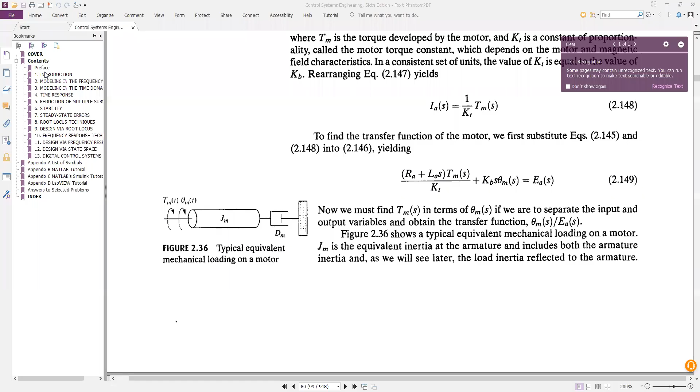Okay, let me share the screen. So from the first chapter, what you'll read? You see, that is your first chapter - Introduction to the control system.

In this chapter, you have to read the definition of control system. I have given you the sheet already, the slide is given to you. So first of all, you need to learn the definition of control system. Then see, control system - they define it.

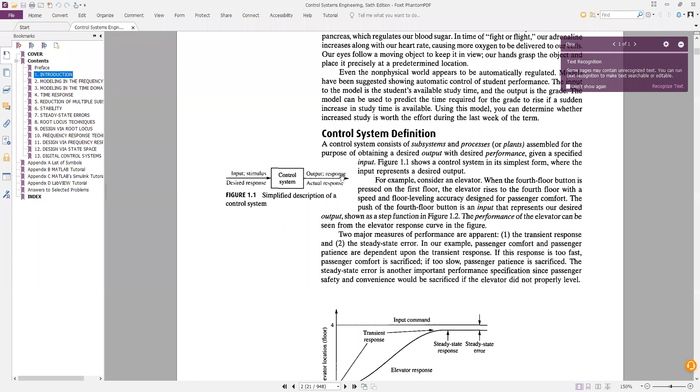And you need to know the block diagram of control system - what is the block diagram, and how does it represent? Okay, that is the thing. And see, some examples are there. These are the advantages of control system.

See why they use a control system - 4 primary reasons are there, like power amplification, remote control, convenience of input form, compensation for disturbances. These are the advantages of control system.

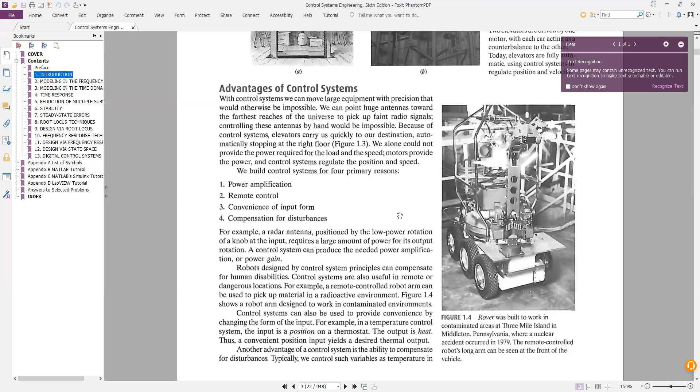And remote control, that means you can control any system remotely. The example is like a rocket or the satellite - NASA is controlling those things from the earth. And convenience of input form - you can change the input form, and compensation for disturbances. So these are the reasons why we use the control system.

Some histories are there. We do not need the history. If you want, you can check and see.

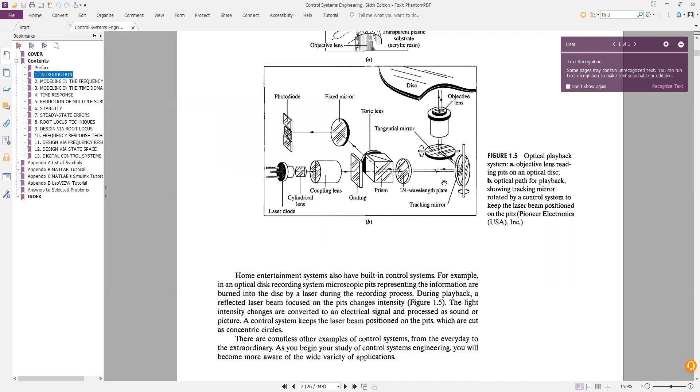It is an example - optical playback system I've given to you - and some types of control system like open loop and closed loop control system. This is the open loop - open loop has no feedback. On the other hand, closed loop has some feedback. So that is the main difference between open loop and closed loop control system.

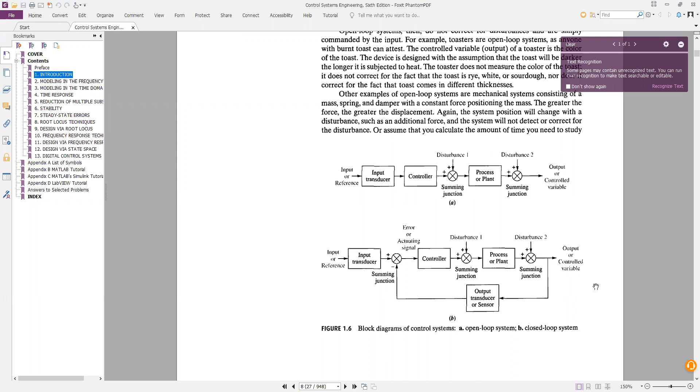And some other differences are also there, so if you check, then you can find it out - open loop and closed loop control system. See, that is another one - the hard disk. Hard disk is another example of control system.

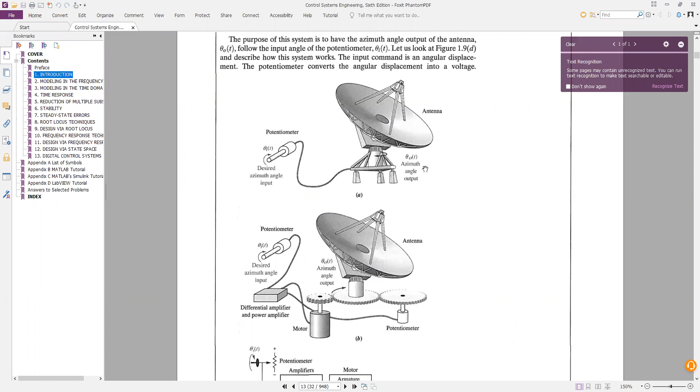It is an example of azimuthal control system - see, radar system. Here you are putting the desired angle, and according to your input, the antenna will rotate. That is another type.

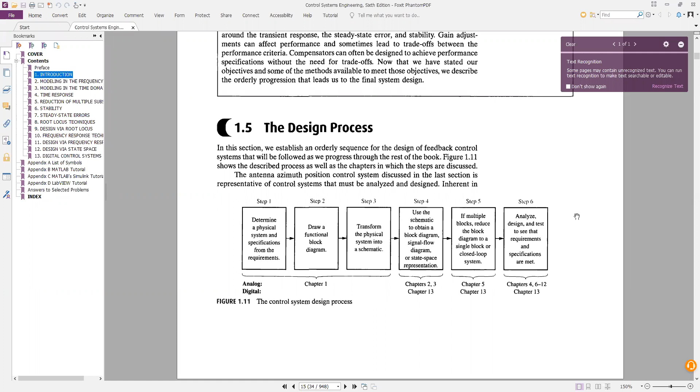And that is the design process actually - the steps are given here. These first three steps have been discussed in chapter 1, and 2, 3, and 13. Chapter 2, 3, and 13 contains step 4, and step 5 is discussed in chapter 5 and 13, and the final step, step 6, which is discussed in chapter 4, 6 to 12, and chapter 13. Okay, that is the thing, design process.

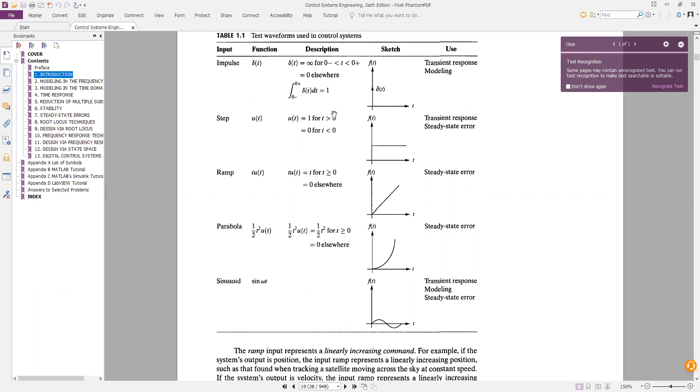So if you look at the first slide, then you can check this out and see these things are important. See, waveforms - I think I have discussed these things in the previous courses. See this, what are there? That is the impulse response, that is the step response, that is the ramp, that is the parabola, that is the sinusoid.

Remember this thing for your future studies. Delta T, impulse response delta T. I asked this question in the Viva in the last course, but unfortunately most of you have failed.

That is the problem, sir. Most of us, what do you say, sir? I have asked you about the impulse response. I just draw this one and asked you what type of signal this impulse is. But most of the students have failed to answer the correct one.

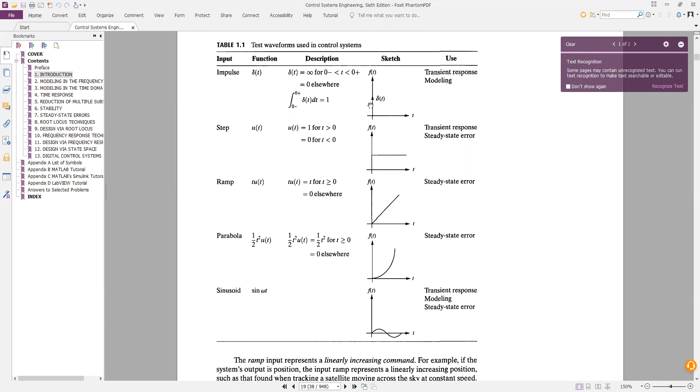Do you remember? Yes, sir. Some of you have failed to answer these questions. What is this? This is a step response. Let me zoom it. That is a step response.

Don't forget these kind of signals ever, because you are an engineer, an electrical engineer. You cannot forget this one, right? You have to remember all the time.

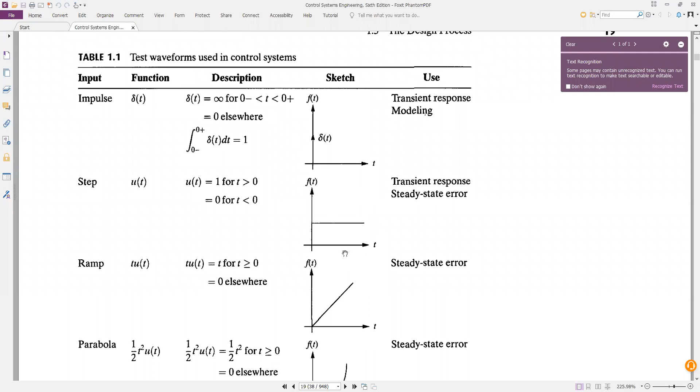So that is impulse response, that is step response. This is ramp, this is parabola, and this is sinusoid. Actually we do know the sinusoidal signal, but we forget about the others, which is very bad. We have to remember all: impulse, step, ramp, parabola, and sinusoid.

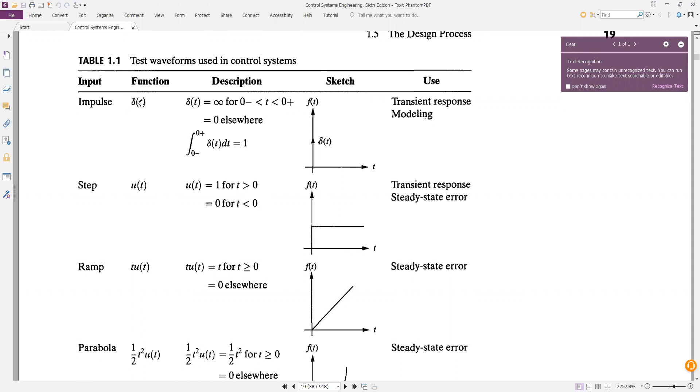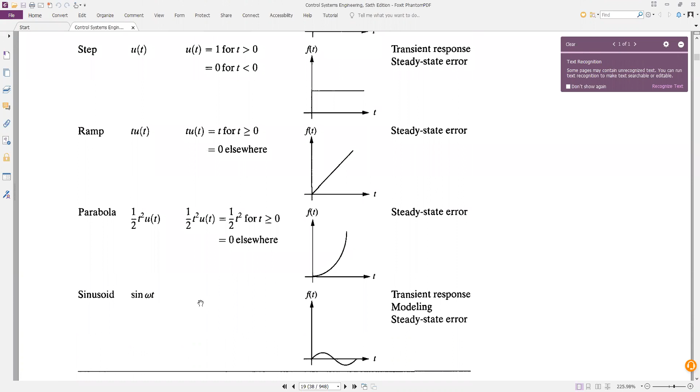And also remember the type of function. See, that is the delta function, delta t. That is ut, that is t ut, that is half t square ut, and this is sin omega t. These are the functions of this one.

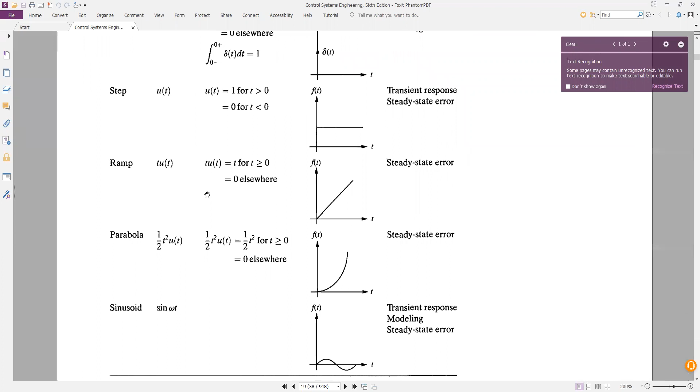Remember these things and it will be helpful for you in the future. So remember table 1.1. You can write it down on your notepad, on the paper, that it is table 1.1 from the book. You have to remember these things, because sometimes in the Viva I can ask you.

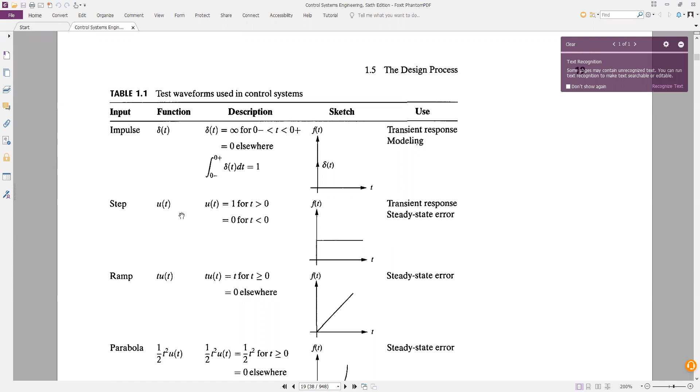At this level, do not forget this mistake. Do not mistake about this one. And that is from the first chapter.

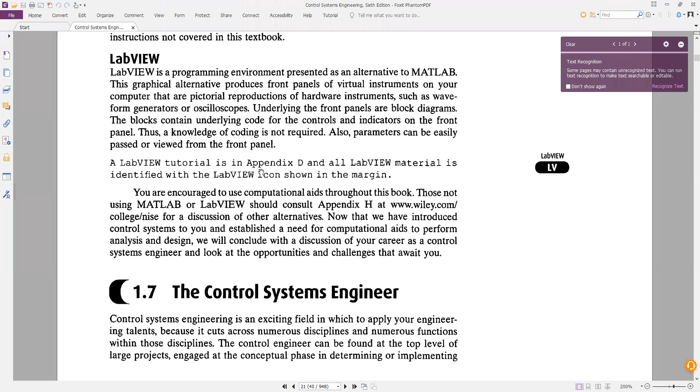So from the first chapter, what did you study? What is the control system, and what are the types of control systems, and what is the difference between the types, like open loop, closed loop? And what are the input waveform types, like impulse function, like a step, like ramp, like parabola, etc. So do not forget this one.

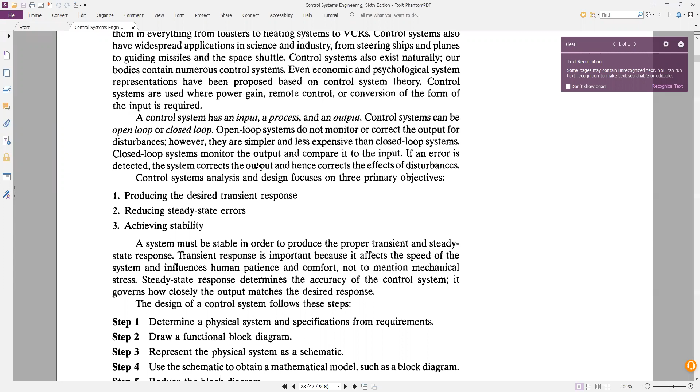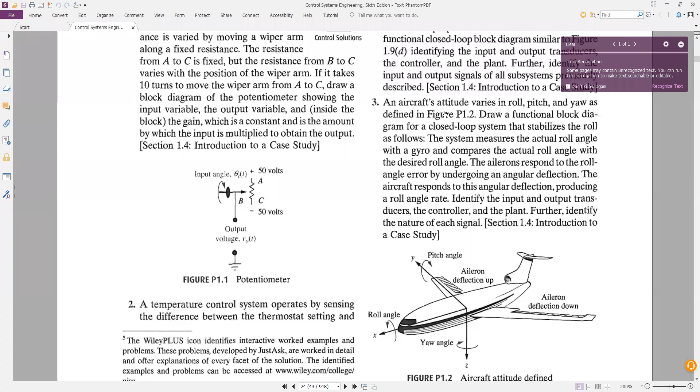Now, see, these are the actual problems. If I give you these things as an assignment, it would be very difficult for you. An aircraft's attitude varies in roll, pitch, and yaw, as defined in figure P1.2.

See this angle, that is the roll angle in the aircraft. This is the yaw angle. Yaw, see, Z. And that is the pitch angle. This is Y. X, Y, Z. That is the roll angle, that is the pitch angle, and that is the yaw angle.

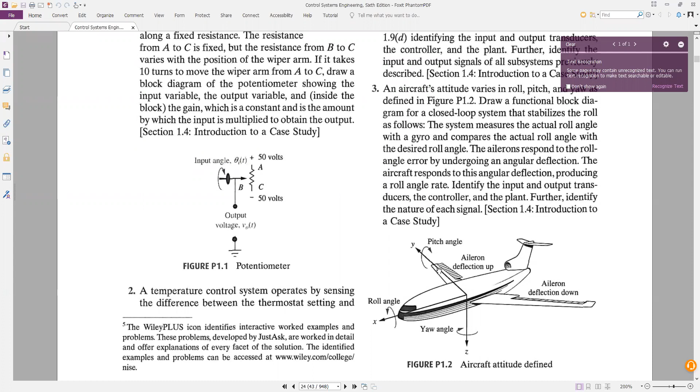See this part of the aircraft, it changes in the pitch angle, and the bottom part changes according to the yaw angle, right? And that is the roll angle.

An aircraft's attitude varies in roll, pitch, and yaw as defined in this figure. Draw a functional block diagram for a closed loop system that stabilizes the roll as follows. The system measures the actual roll angle with a gyro and compares the actual roll angle with the desired roll angle. The ailerons respond to the roll angle error by undergoing an angular deflection. The aircraft responds to this angular deflection, producing a roll angle rate. Identify the input and output transducers, the controller, and the plant. Further, identify the nature of the signal.

See, that is the problem you need to check. Okay, these things you can check.

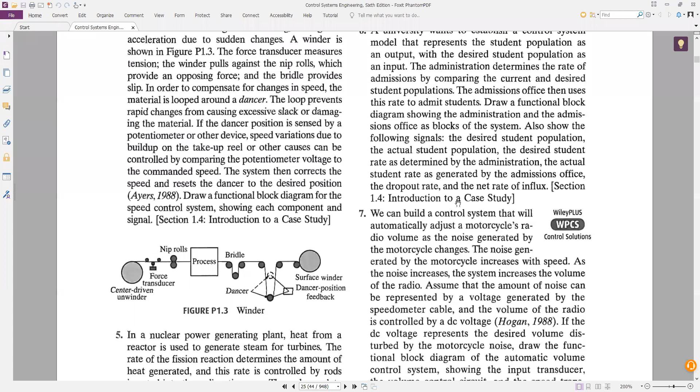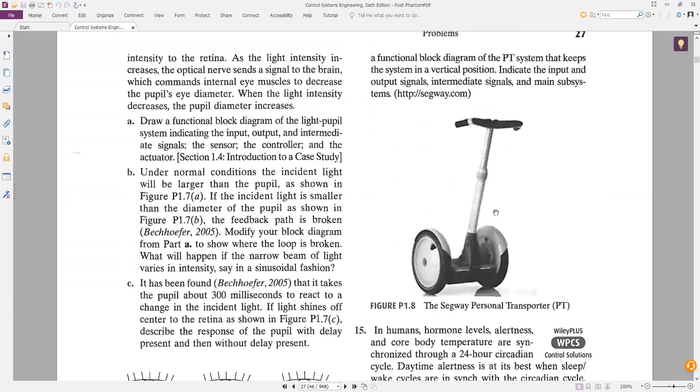Okay, so there are some other problems. See, pupil is shown black. Light beam is shown white. Light beam diameter is larger than pupil, light beam diameter is smaller than pupil, narrow light beam is illuminated at pupil's edge.

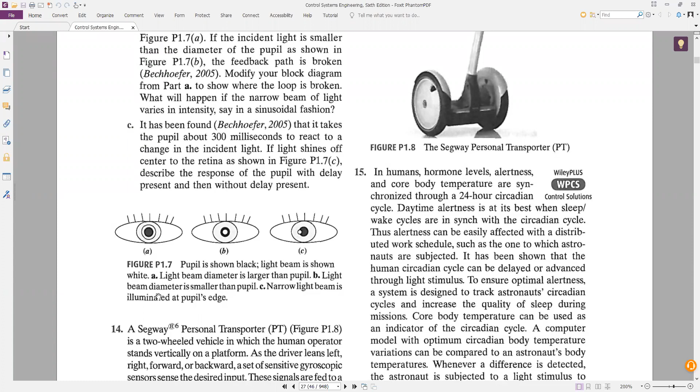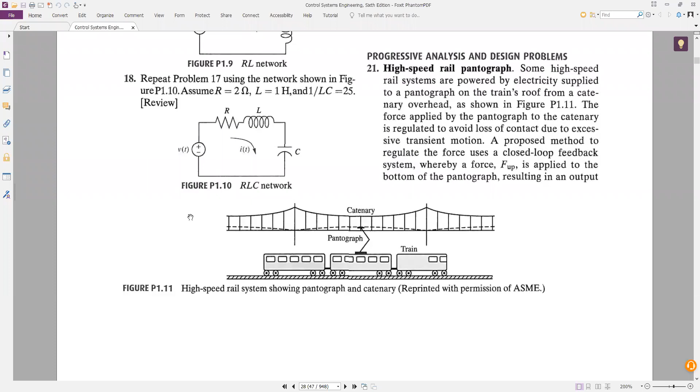These are actually the problems you have to check for your better understanding about the control system, but I am not giving you here. If you try to solve these at your home, I think you will have a better idea about the control system. But since we have limitation of time, we cannot do whatever we want.

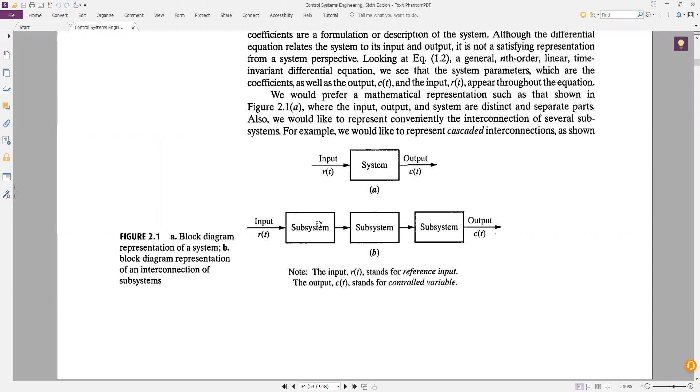Okay, now modeling in the frequency domain from chapter 2 - what you have to learn, what you have to check. You have to check a few things like...

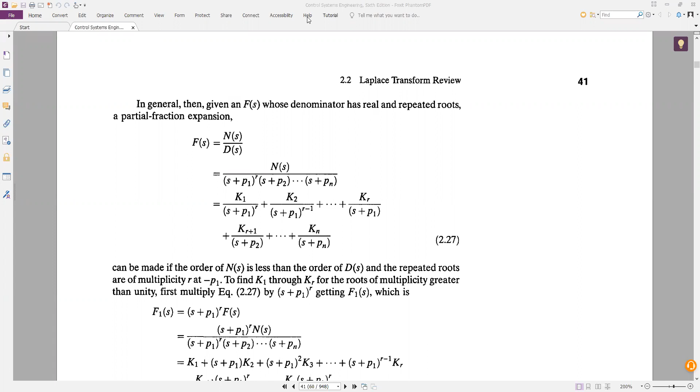Okay, so transfer function comes in chapter 2. So you have to check the definition of transfer function as well as some examples.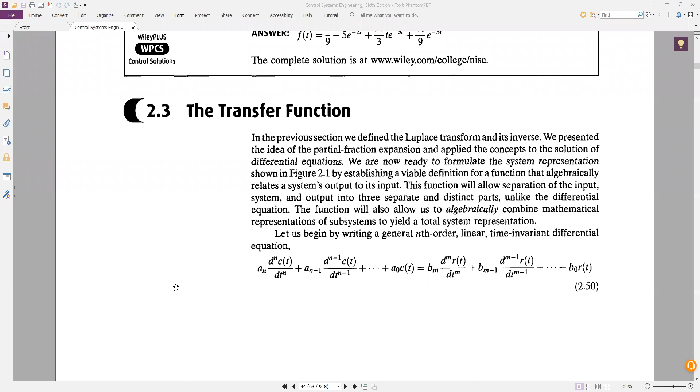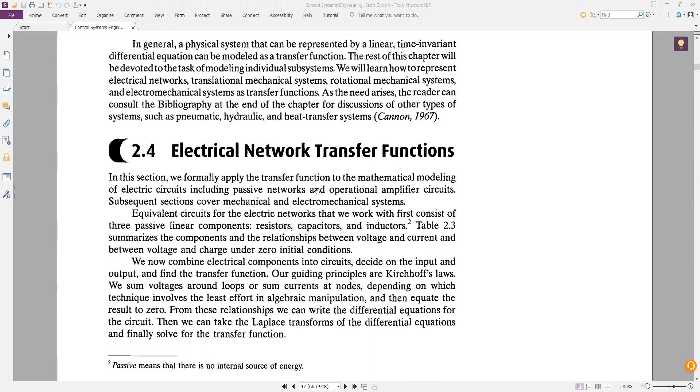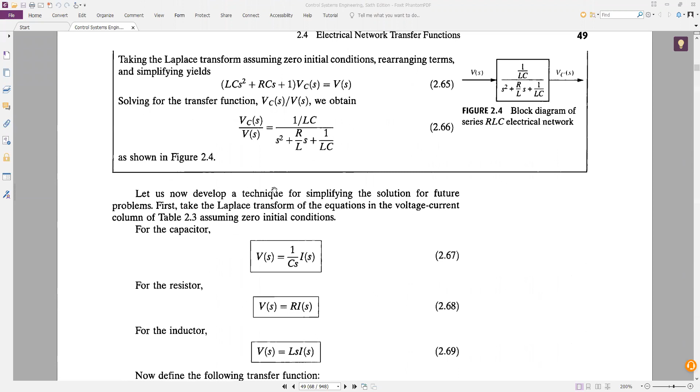So from the transfer function, you have to check some problems - some default problems, electrical network transfer functions. You need to remember the table so that you can solve given problems like 2.6, then mesh analysis problems are also given, as well as the op-amp problem.

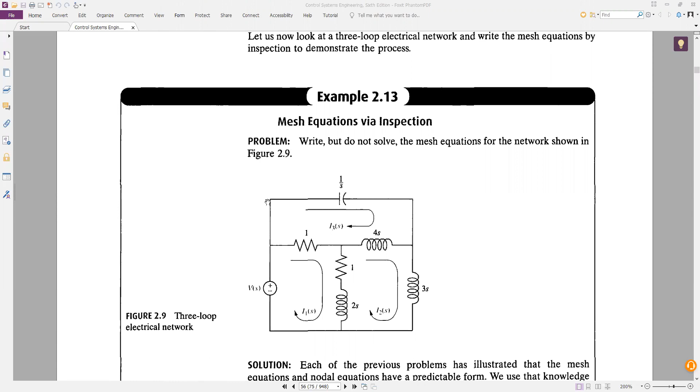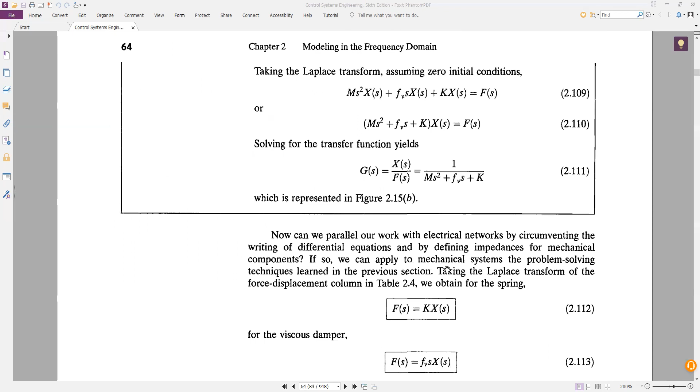After that, we have discussed the translational mechanical system transfer functions. From here, you have to check only two problems, 2.16 and 2.17. Only two problems you have to check, and 2.18 also.

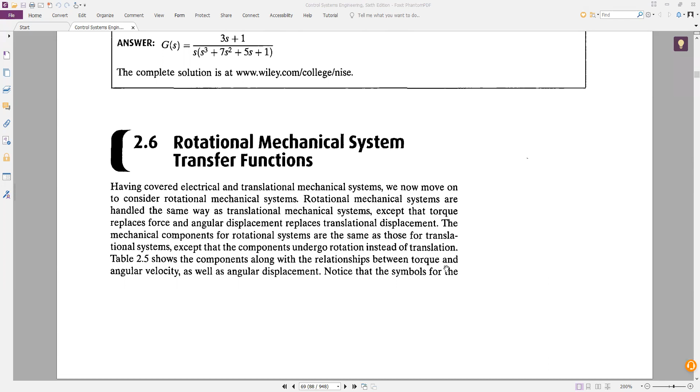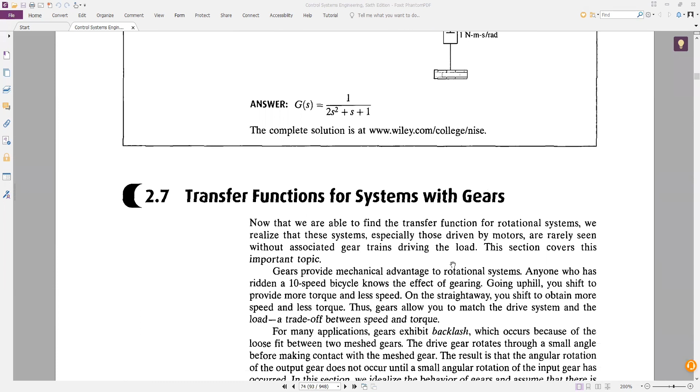And from the rotational mechanical system, this one, you have to check 2.19, 2.20, that's it. And with gears, transfer functions with gears, from here you have to check 2.21 and 2.22.

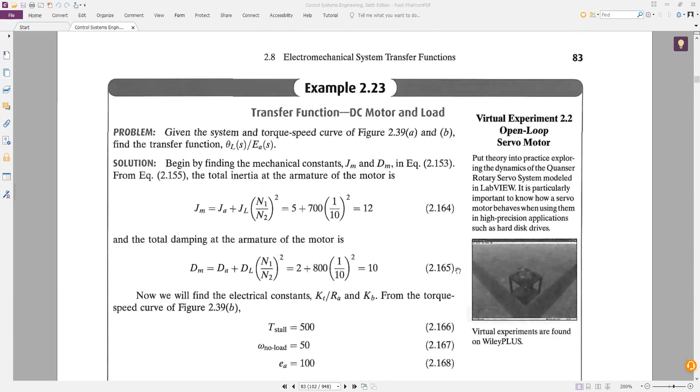And also I have discussed this one, and I have shown you this problem also, 2.23, transfer function of DC motor and load. Only problems - for the assessment I'll give you problems mainly, so be careful about that.

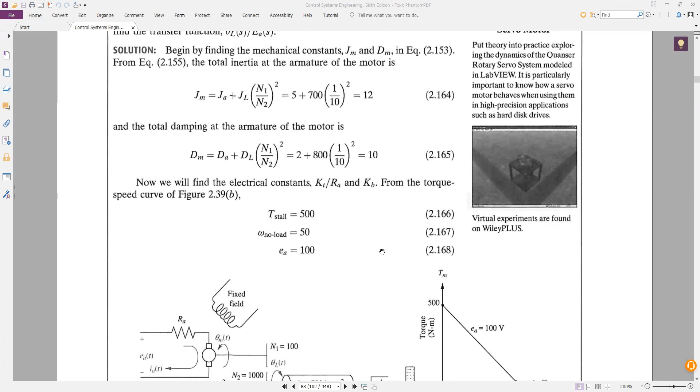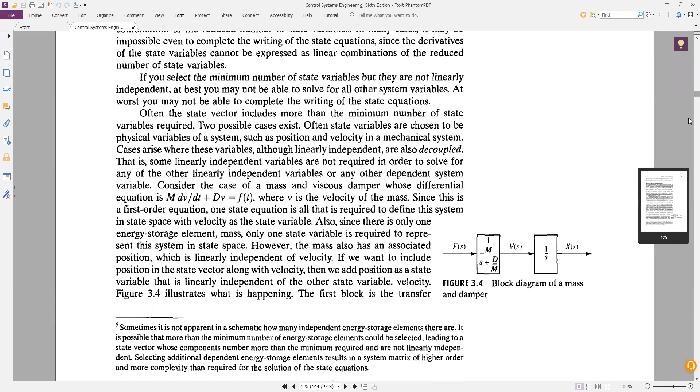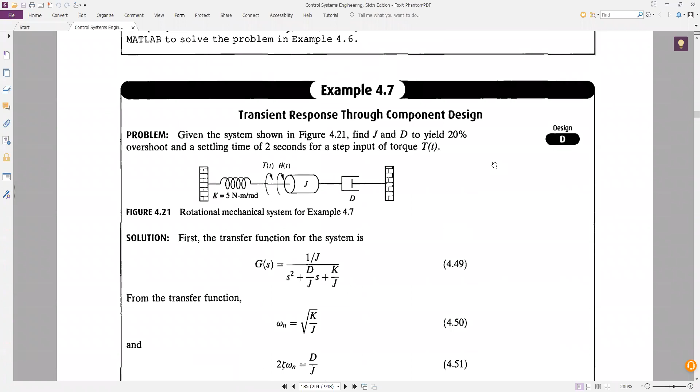And then we have to move to chapter 4. Chapter 4 is a very easy one among this. Let me show you.

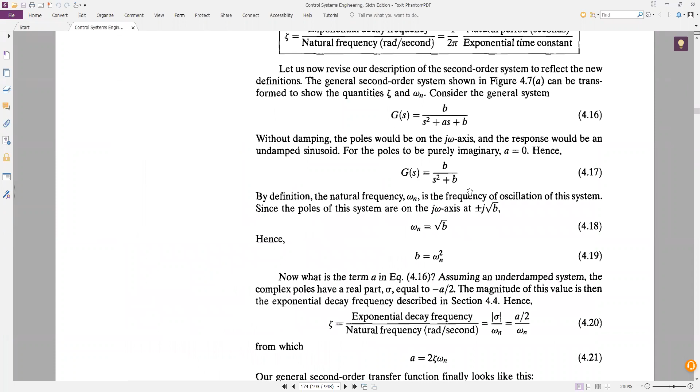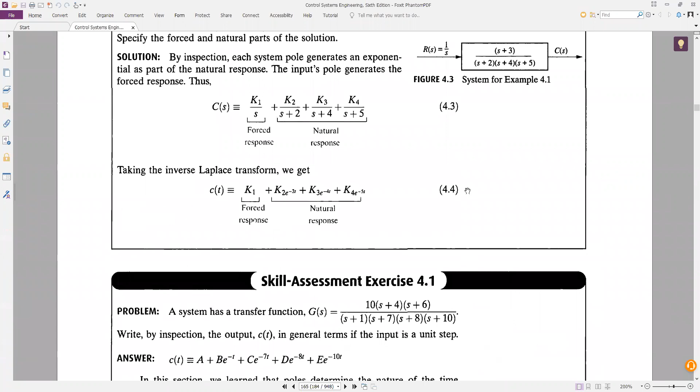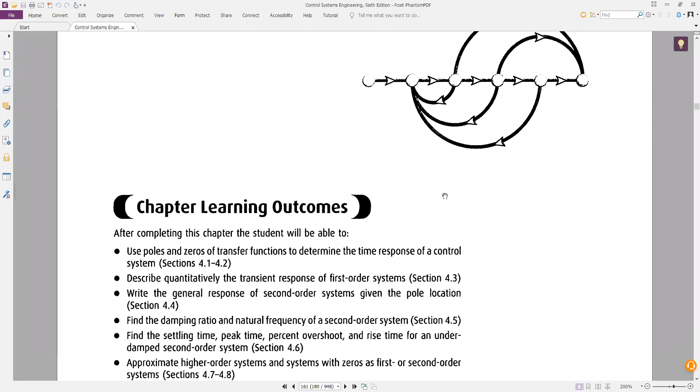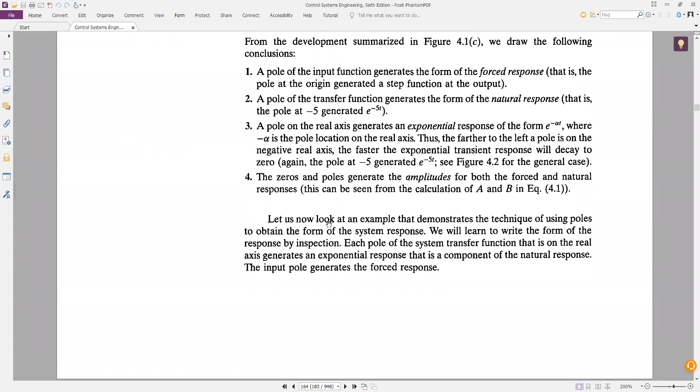Time response - this is chapter 4. So from chapter 4, first of all remember the definition of poles and zeros. What are the poles? What are the zeros? Remember these things. Then you have to check some problems regarding poles and zeros.

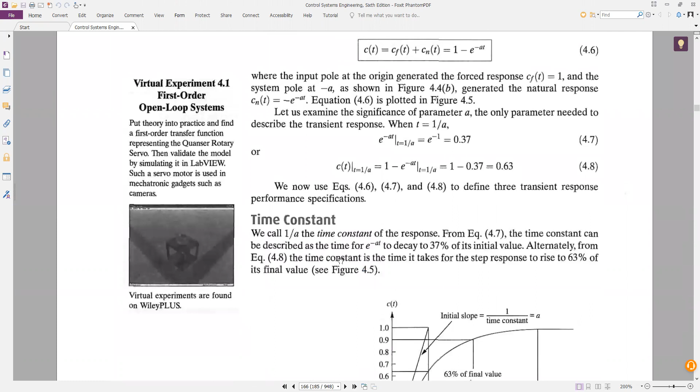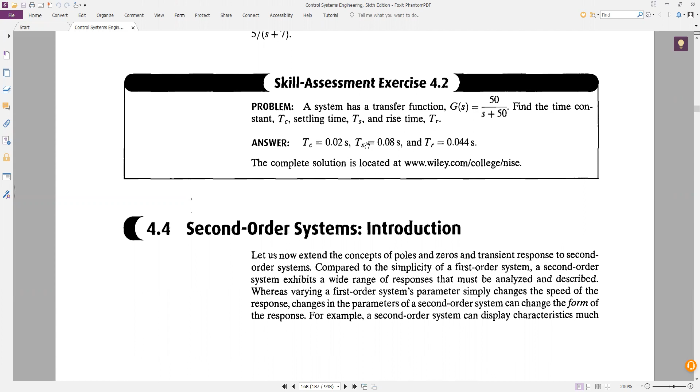And for the first order system, you have to remember time constant. What is the time constant? 1 over A is the time constant. And rise time, settling time - these things you have to remember. And see the skill assessment exercise which is 4.2, a simple problem. And 4.4 is the...

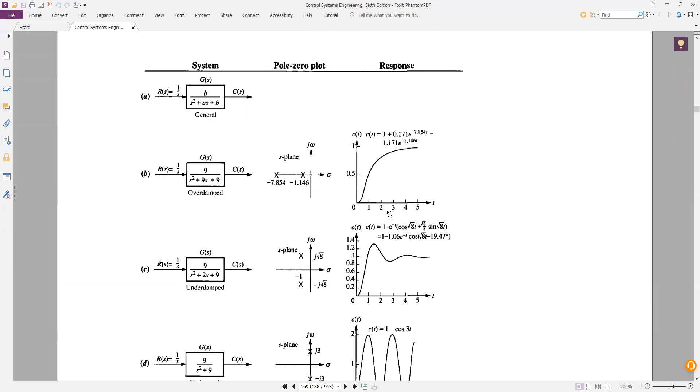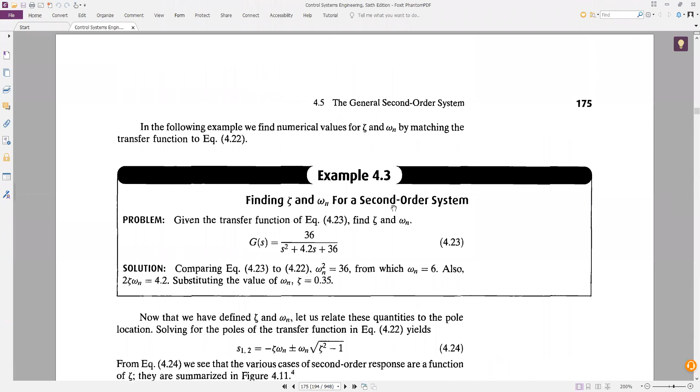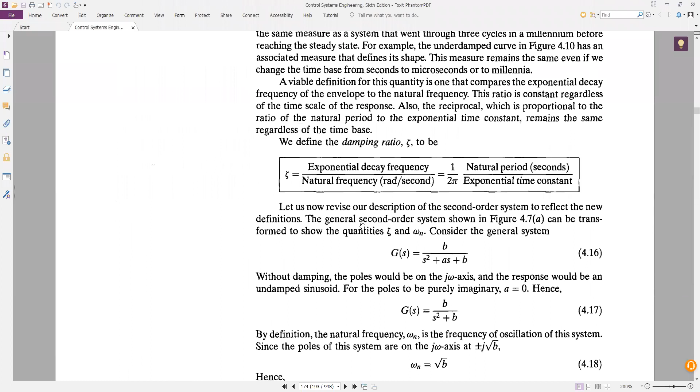second order systems. In the second order system, you need to know the type of figures you're dealing with. The general second order system - here we have to consider the damping ratio zeta and natural frequency omega n. We have to check this out, and you have to remember undamped, underdamped, critically damped, and overdamped - this kind of figures, how it comes.

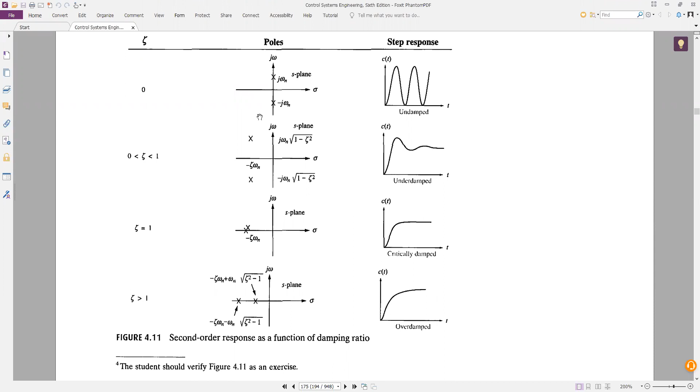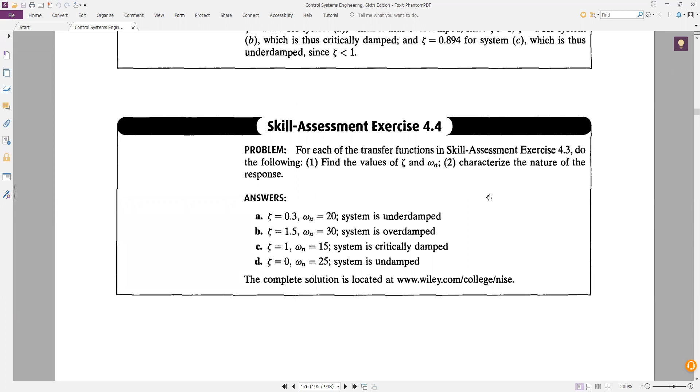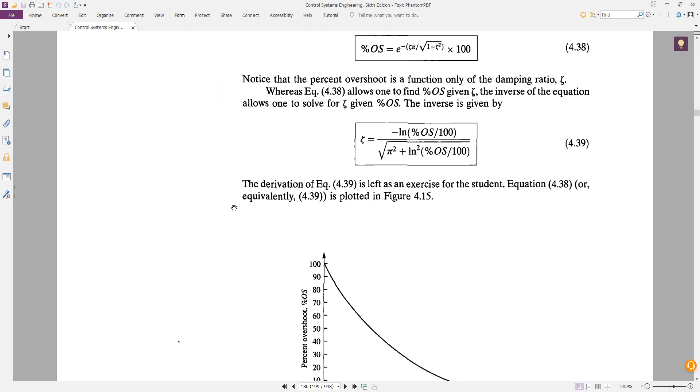Here you have problems 4.4 and 4 - skill assessment exercise 4.4, if you check this out you can find it easily. And after that we have checked evaluation of TP, peak time, percentage of overshoot, and related problem - this one, 4.5. So your chapter is up to 4.5.

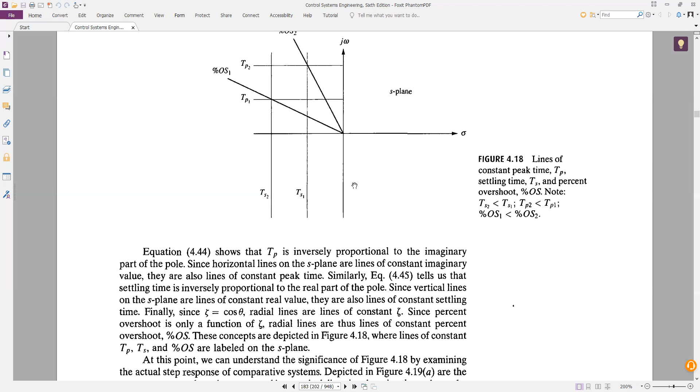In between, we have skipped chapter 3, which I'll show you after the mid, inshallah. That is the additional part.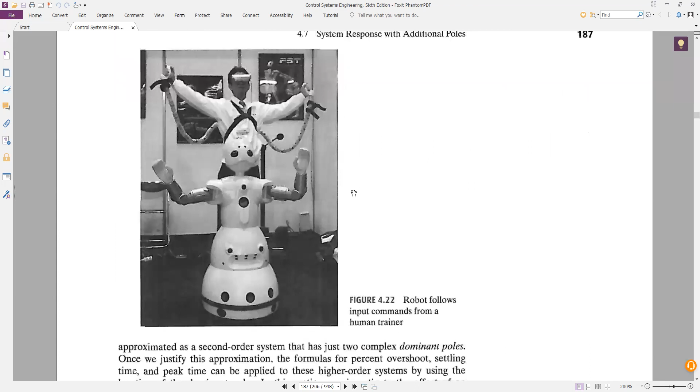Another one, see, robot follows input commands from a human trainer. See this one, that is the example of control system - a robotic system which is following the instruction of the trainer.

Okay sir, and these are the examples. So I think you have some idea what kind of thing will come in the assessment, and Viva will be regarding this.